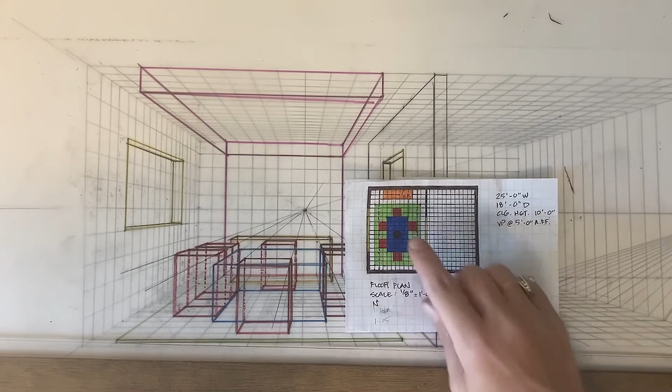In this video, I'm going to teach you how to draw the pendant light, and you can see here it's situated right over the dining room table, and it's eventually going to be round, but we're going to just draw the box that it comes in for right now, which is a 2x2 box. Now we have 10-foot ceilings. We've dropped the ceiling down 1 foot, so we've got 9 feet now.

And so we really don't want this light to be any longer or any shorter than, I'd say, about 6 feet off the ground. Even though there's a table in the way, sometimes there's a large floral arrangement, or maybe the table moves eventually. We don't want everybody in the world to have to duck, maybe just the tall people to duck.

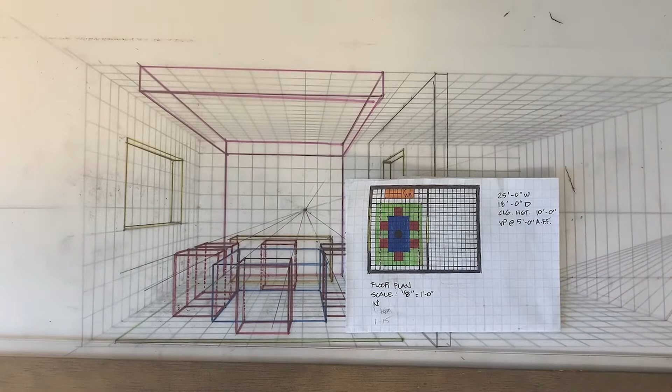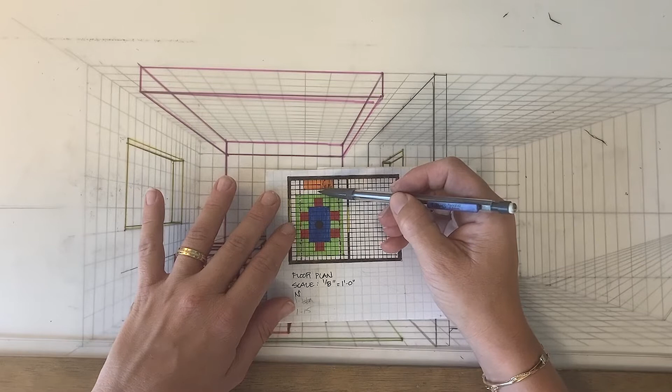So what I'm going to do first is figure out the actual location of the top of the box, or where it sticks to this ceiling. So the first thing we're going to do is establish that location on the bottom side, or the bottom face of this dropped ceiling. And so you can see here, it's going to come out 1, 2, 3, 4, 5, 6, 7, 8, 9. So we're going to draw box lines right here, and lines right here, and then lines right here, and lines right here.

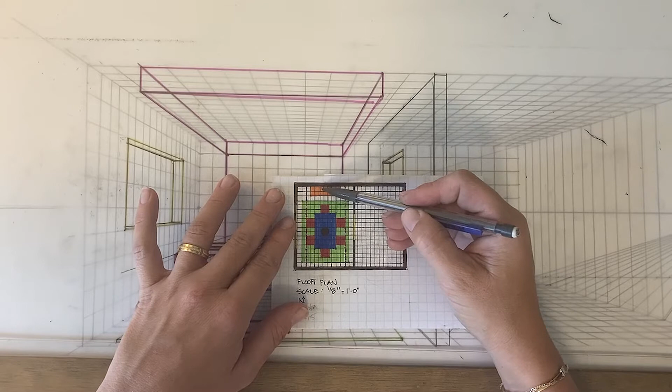Now, the location on the true height wall, if we come back this way, it's going to be right here. So that's 1, 2, 3, 4, 5. Let me count again. 1, 2, 3, 4, 5, 6, 6.5. Okay, so let's draw just some guidelines here. It's going to be probably a little bit hard to see your true height line all the way at the bottom, so I'm going to just count it over here. 1, 2, 3, 4, 5, 6. 6.5 is right here.

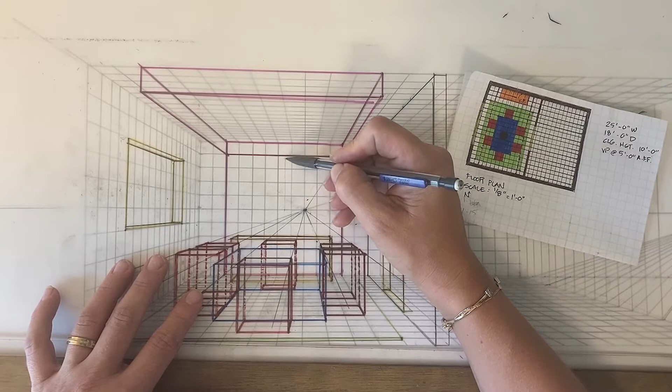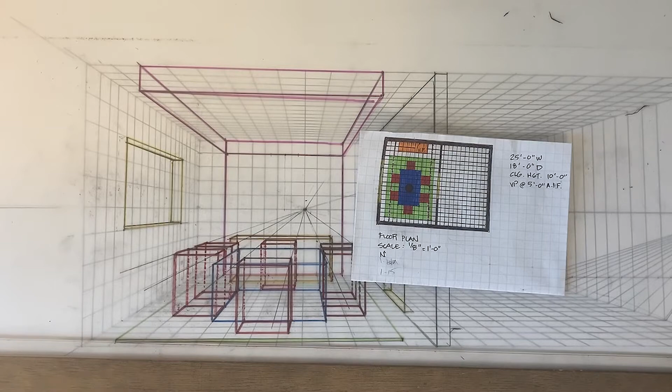So if we go up, we're going to think about this face as our new ceiling. So the center of where that light is going to appear on this ceiling is going to be right at that line. But remember, it's 2 feet wide. So we have to come here, that's 1 foot, and on this side, also 1 foot. So now, of course, we're going to grab our triangle or our ruler, and I'm going to draw the lines on the ceiling where that box is going to stick.

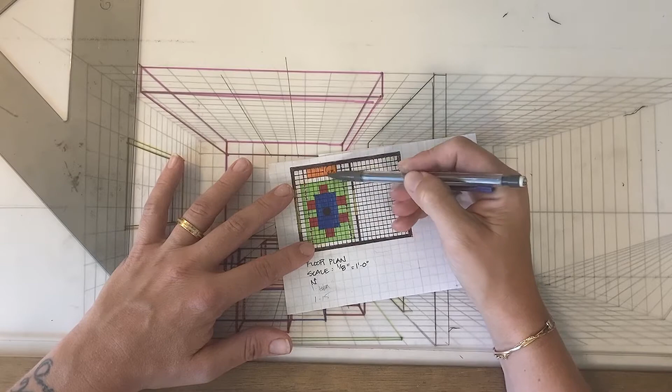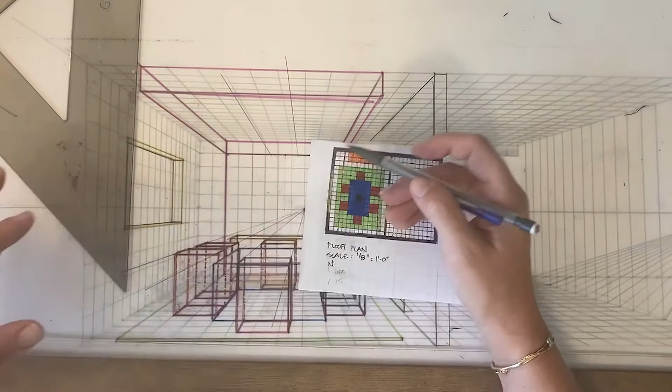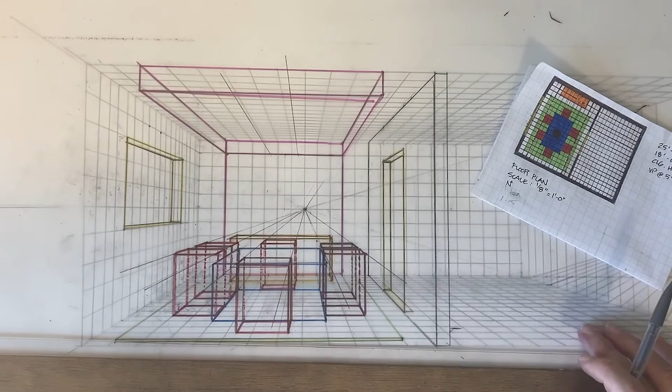Okay, so I've just drawn these lines right here. Now what I need to do is draw the lines over here. They're going to be right here, and right here. So 1, 2, 3, 4, 5, 6, 7, 8, 9. At the 9-foot mark, the box is going to start, and then it's going to go for 2 boxes. So let's go take a look. We can come over here. 1, 2, 3, 4, 5, 6, 7, 8, 9. And it's 2 boxes wide, so there's 11. So now all we have to do is bring our T-square up and carry those lines over.

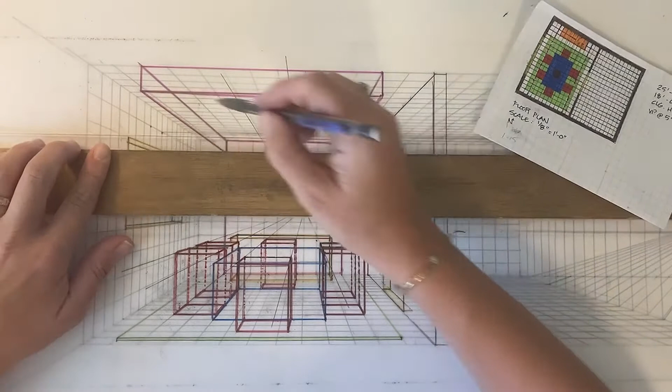Now keep in mind, it's going to align with boxes on the ceiling, or it may. That's a coincidence here in this case, because remember, we're not sticking this on the ceiling, we're sticking it on the drop ceiling. So that's the top of the box that this light comes in.

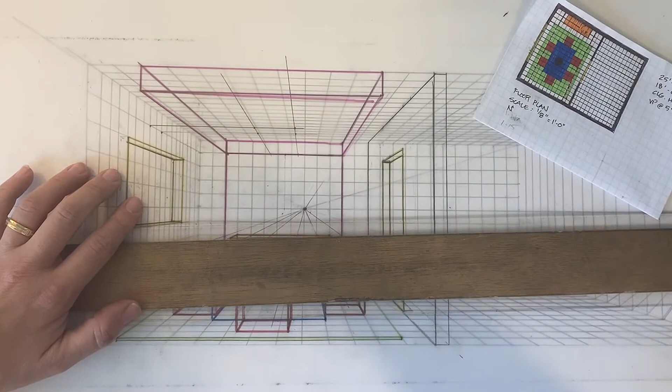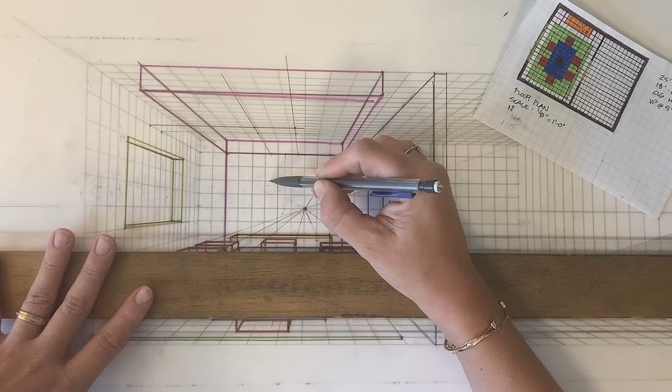Okay, so the next thing we're going to do is make this thing, let's see, about 3 feet, but again, we're going to have the shade and the escutcheon plate and things like that. You know, I'm going to change my mind. I'm going to do it 2 feet tall. So let's go ahead and draw our line here.

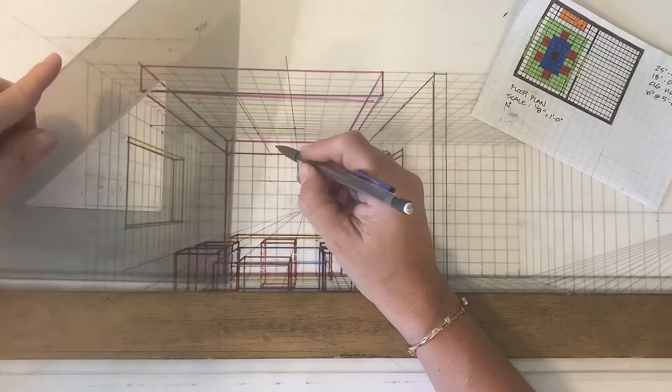Now, in order to make sure that we get this really correct, I'm going to drop my lines from where I've created it on the true height wall above to make sure that the top and the bottom are aligned. So I just painted two 2-foot long lines along that true height wall. Now I'm going to carry them back over here. Connect from my vanishing point, and those are coming out in space. We don't know at what length to stop them yet, but I bet you can guess.

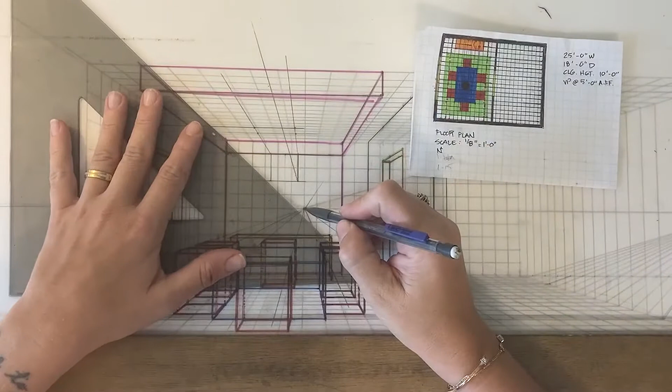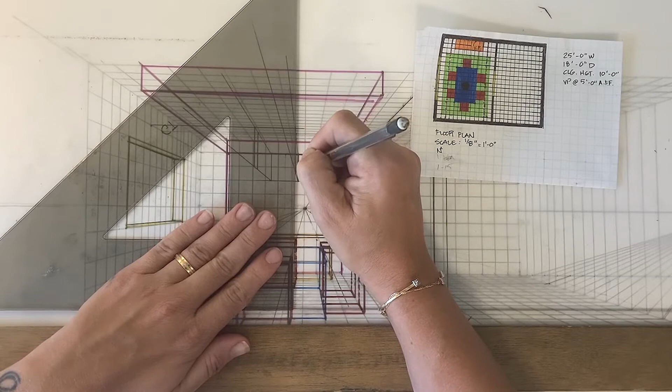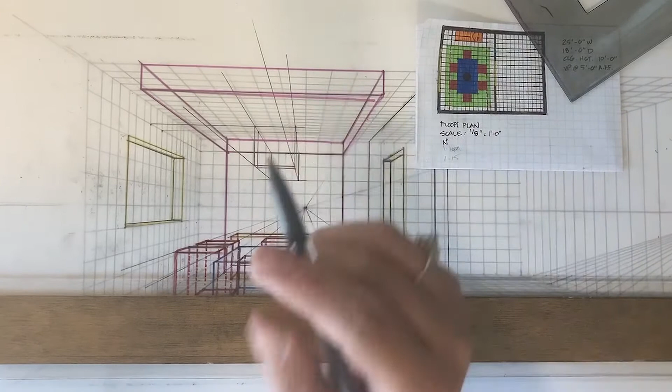Perfect. So now we've got the front of our box and the back of our box drawn here. All we have to do now is drop down. And now we can make sure that we carry this over correctly. So we've got the front of the box here, and the back of the box here. And then a couple of lines are going to disappear. Let me ink this in to help you visualize. And something very interesting is going to happen that we haven't seen before.

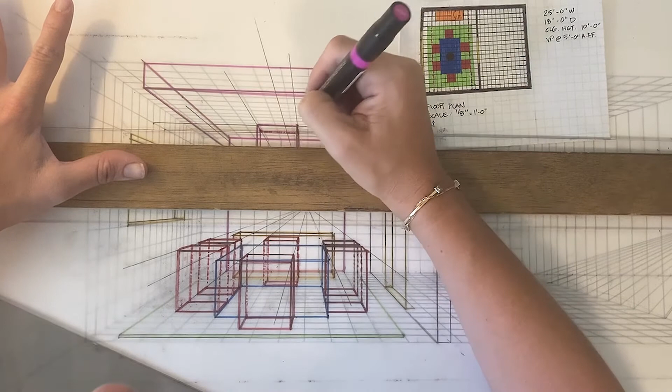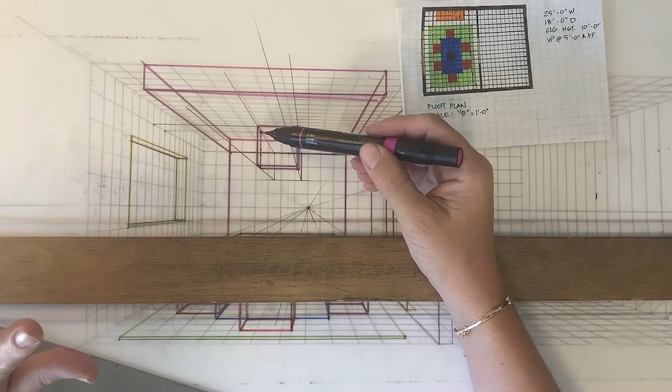And a dash in the back of the box where it's sticking to the ceiling. Now, let's take a minute and see what's happening here. Notice we see the underside of the box that the pendant goes in, and that's because if we hold our hand above our eyes, we see the underside of our hand. You can see the front of the box is actually up higher than the back of the box, because this box is above the horizon line. So you see the underside of it. It's the same reason why we see the underside of this and the underside of that.

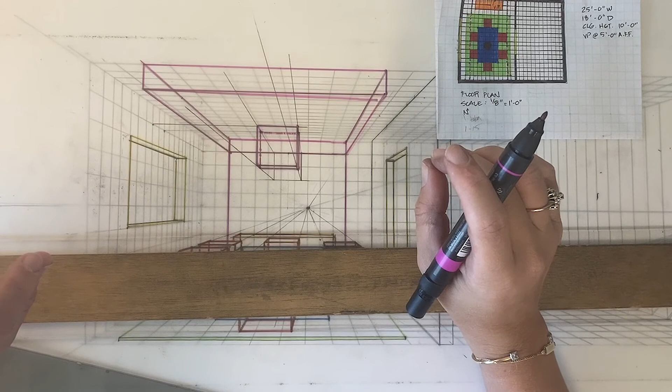Now, it's very foreshortened as well because it's really close to the vanishing point. So you've drawn it correctly if yours looks like mine, but keep in mind it's really foreshortened because of its location near the vanishing point, and we see different parts of it because it's above the horizon line.